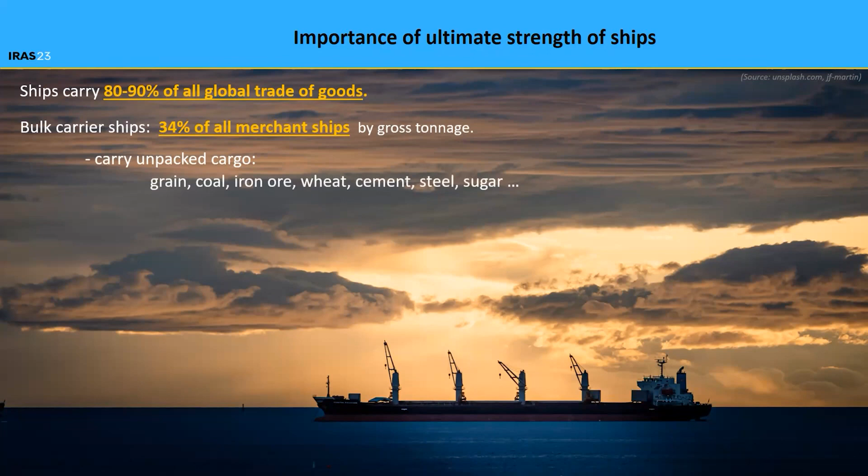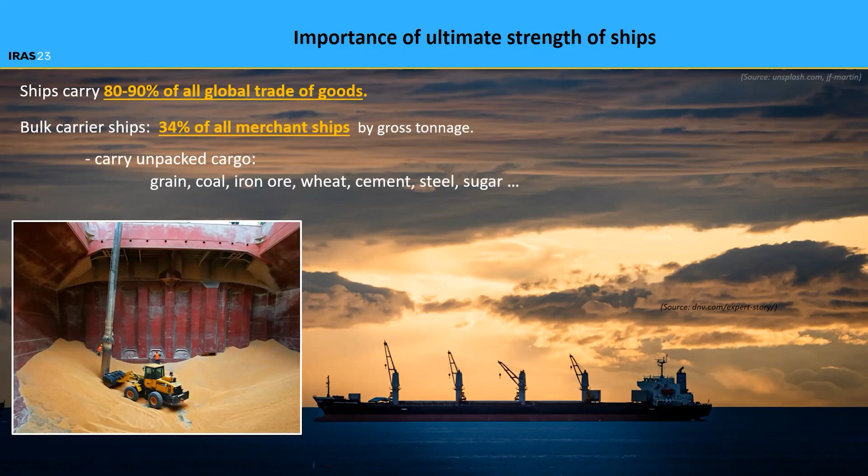Here you can see the shape of one cargo hold, which is structured within this cargo ship shown on the slide. This is basically a box shape in which you load and unload the cargoes. When it comes to age split, almost 60% of these ships are aged between 5 and 14 years, and ships are generally designed to last until being 25 years of age.

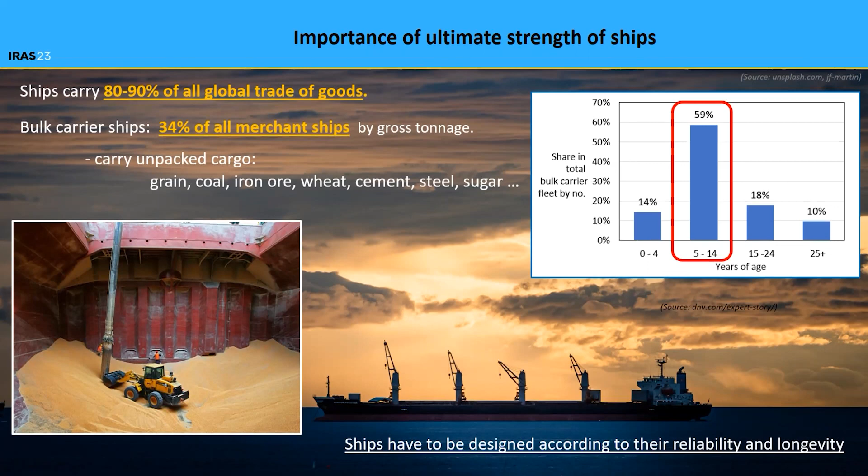So we can conclude basically that ships have to be designed according to their reliability and longevity to experience service loadings, as well as what we call once-in-a-lifetime loadings. In that sense, we have basically two approaches in structural assessment.

The first one is, of course, the traditional one, in which we assess the elastic response of the steel hull. Basically, you impose service loadings, and then you obtain stress. You evaluate this stress based on the allowable stress, which is prescribed by the rules. You can use prescribed rule-based formulas that are based on experience, analytical and numerical methods, and also direct calculations.

Most notably, I would mention buckling assessments, because ships are very prone to buckling and sudden collapse, as they have slender plates, and the slenderness of these plates is very high compared to some other conventional structures. Basically, the outcome of this assessment is whether you state that some type of structural member experiences yielding, collapse, or failure.

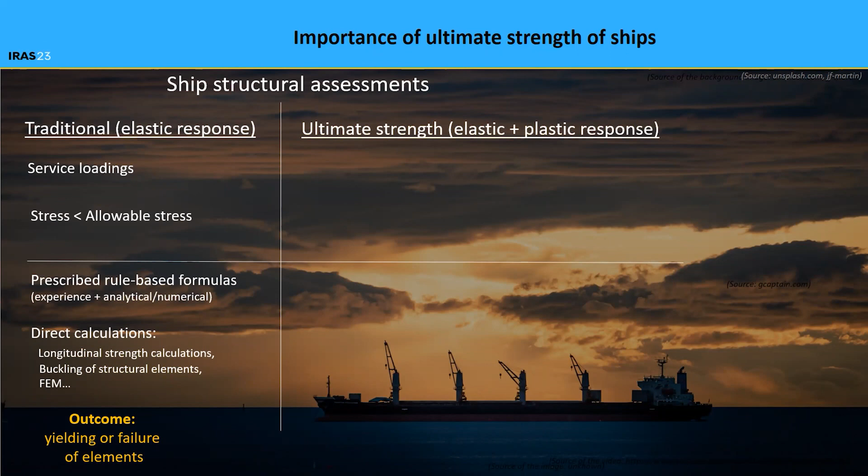On the other hand, we have ultimate strength calculations or assessments that have emerged in use in the past decade. They are based on elastic and plastic response of the hull. They basically evaluate extreme loadings or once-in-a-lifetime loadings, such as overloading events, significant waves, grounding, or improper overhauling.

I prepared a video, but I forgot to copy it into the presentation, so forgive me. This is a very illustrative video. On the left side, you have a bulk carrier barge near Belgrade on the Danube. This event happened a year ago, in May 2022.

So in order to avoid this type of thing, you can do some kind of ultimate strength analysis. This is basically where you evaluate what the tipping point is from which the ship will collapse. You can do that by employing progressive collapse analysis, an incremental iterative method that has been used more recently over the past decade.

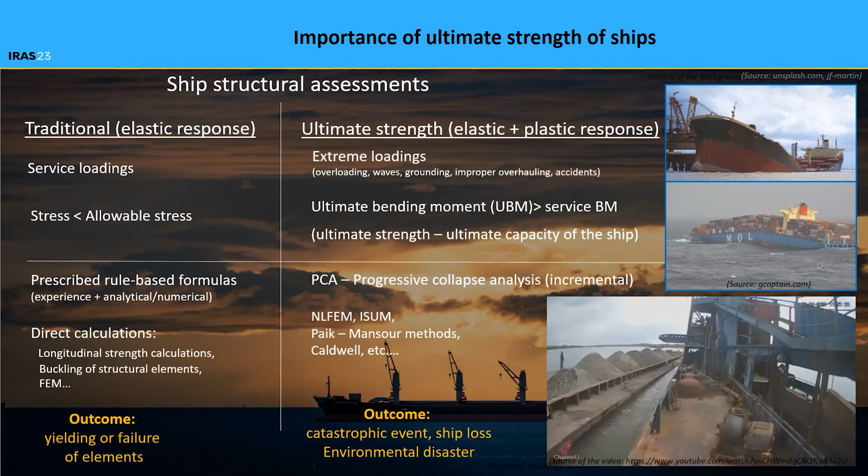Okay, so what we used here is progressive collapse analysis, and basically it relies on a few principles. Firstly, you have the hull cross-section, and here is the deck area, the side area, the bottom area. It is halfway submerged into the water, and what you do is divide your cross-section into, for instance, 100 subsegments.

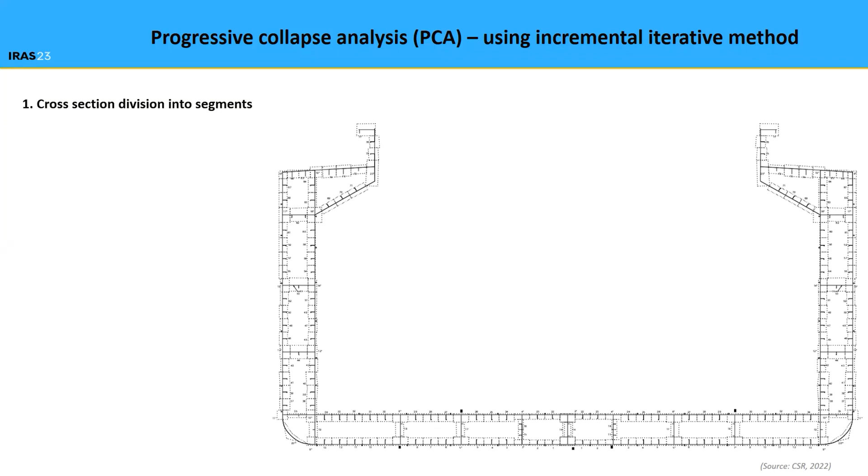Each of the segments represents, for instance, one stiffener, one plate, or a beam or stiffener with attached plating - small structural units, each of which has its own designated stress-strain curves, both in tension and compression, to take into account buckling and post-buckling behavior of each structure.

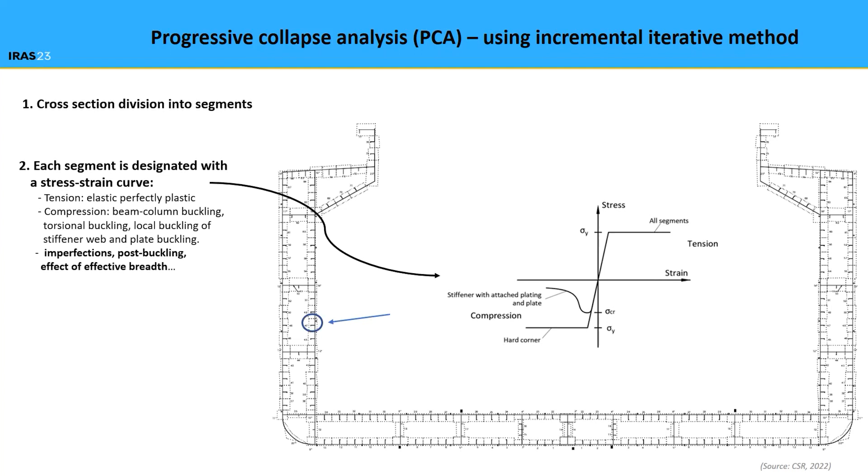So each of these segments has its own curve - it's not just one curve for all segments. Okay, so the next thing that you should do is impose an incrementally increasing curvature on the hull.

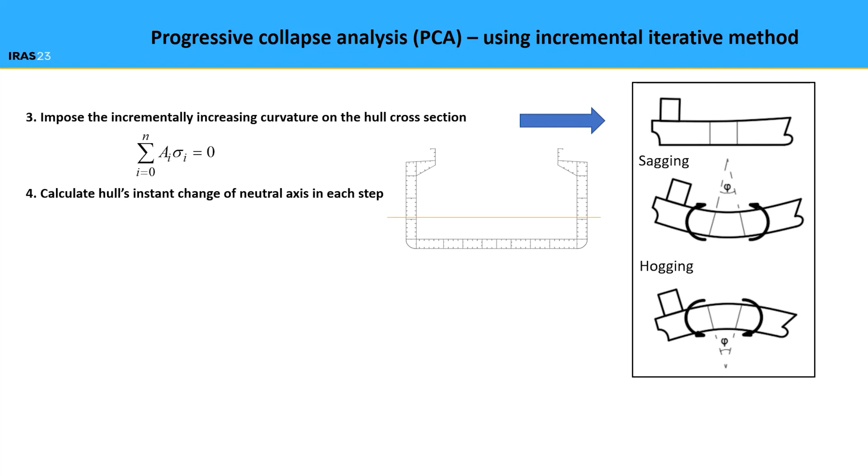You try to impose the curvature. By doing that, the sum of axial forces has to be zero, and you have to calculate the instantaneous change of the neutral axis. As you impose the curvature, the bending rises. As the bending rises, the upper elements collapse and the lower elements experience yielding. Then you have to calculate the strain of each segment, and finally the main outcome of this procedure is to produce a bending moment versus cross-section curvature diagram.

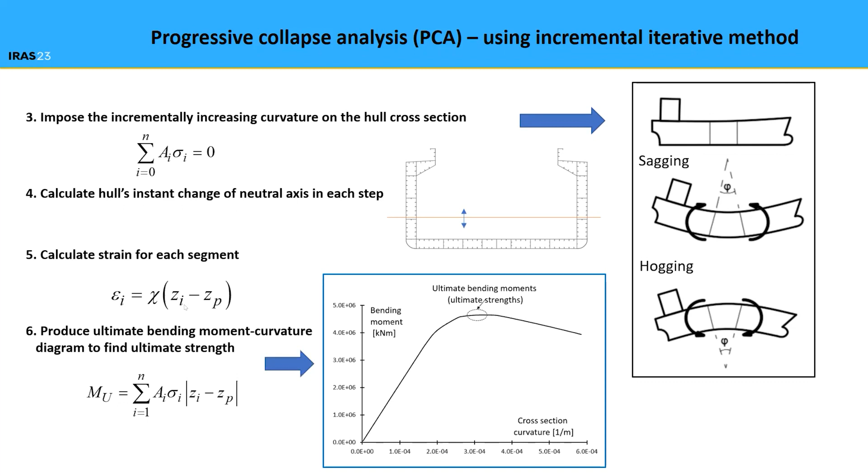When this slope becomes negative, that means the ship or vessel has reached the tipping point from which the ship will collapse.

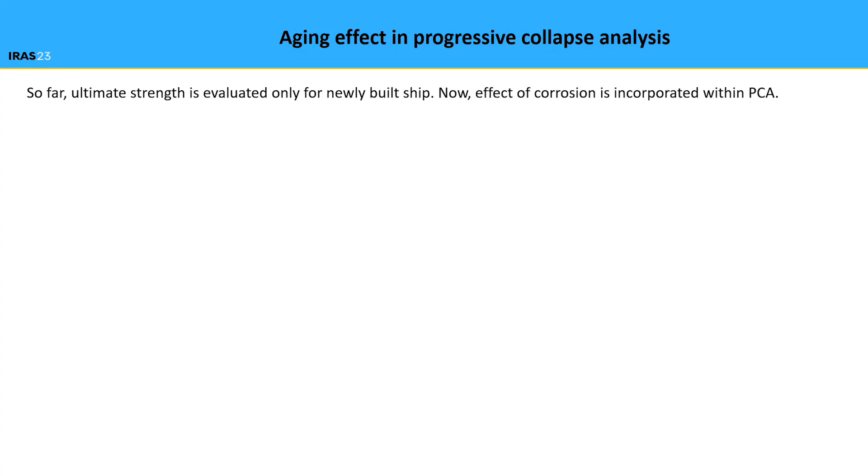However, in recent years we try to incorporate some other phenomena, for instance aging with respect to corrosion, pitting, and uniform corrosion. We model pitting corrosion by means of the pitting intensity degree, which is basically the percentage between the pit-affected area and the element area, and the corrosion intensity degree, which is basically the depth of these pits.

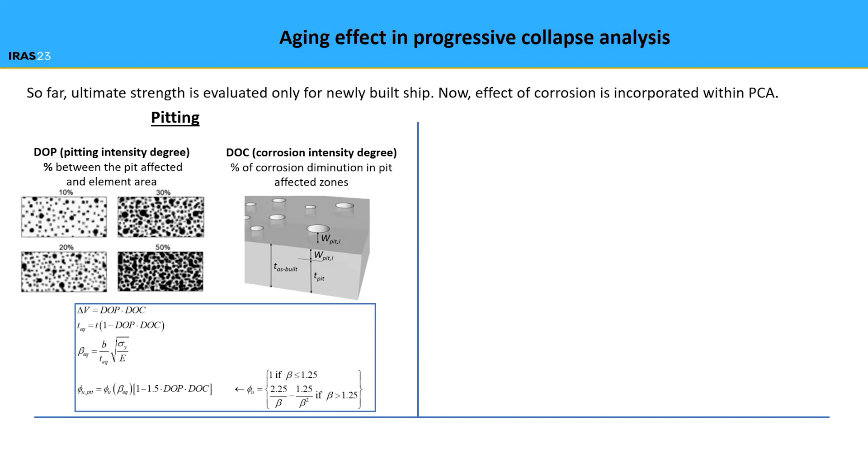By having these two parameters, you can calculate the actual volume loss caused by these pits, and subtract the original thickness by this volume loss to obtain the novel thickness of the aged element of the ship. With that reduced thickness, you also change your slenderness ratio. When you change the slenderness ratio, you change the ultimate strength of that particular element, and when you change the particular element's ultimate strength, you also change the ultimate strength of the complex hull of the ship.

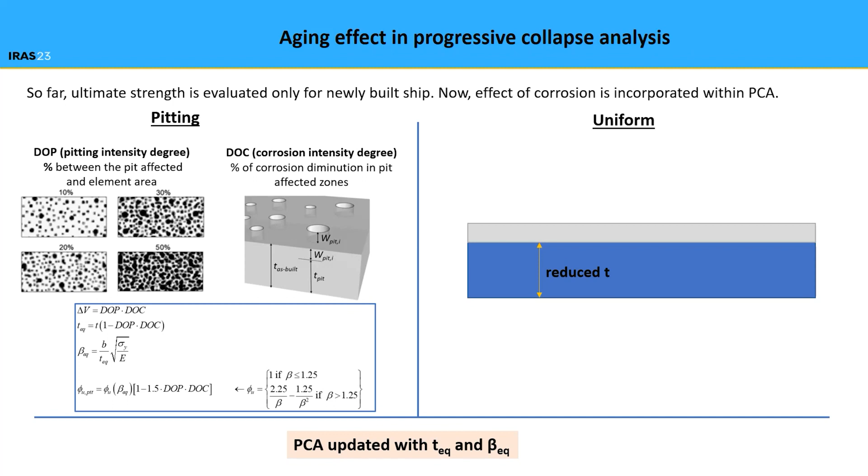On the other hand, when it comes to uniform corrosion, this phenomenon is much simpler because you just reduce the material through uniform wastage. So we updated this method, programming in the reduction of thickness and the change of the slenderness ratio for each of the elements.

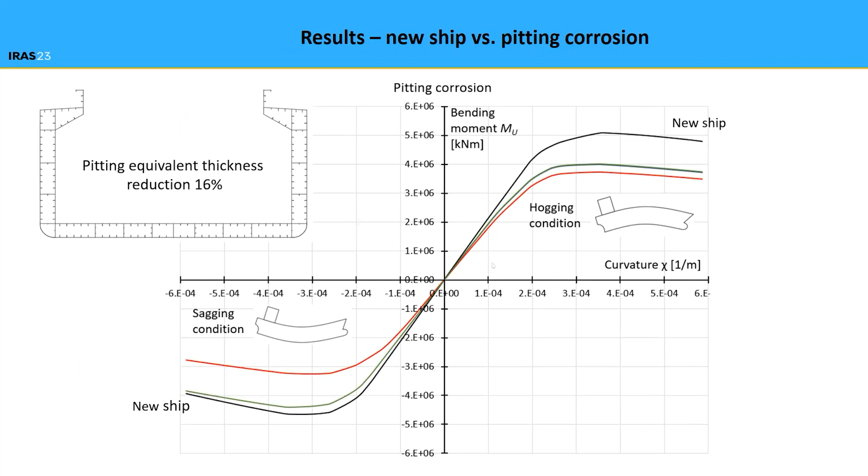So let's see some results. We plotted here the bending moment versus curvature. You are basically increasing the curvature incrementally and calculating the actual bending moment needed for such curvature. This is the curve for the new ship, and this is for the case of pitting.

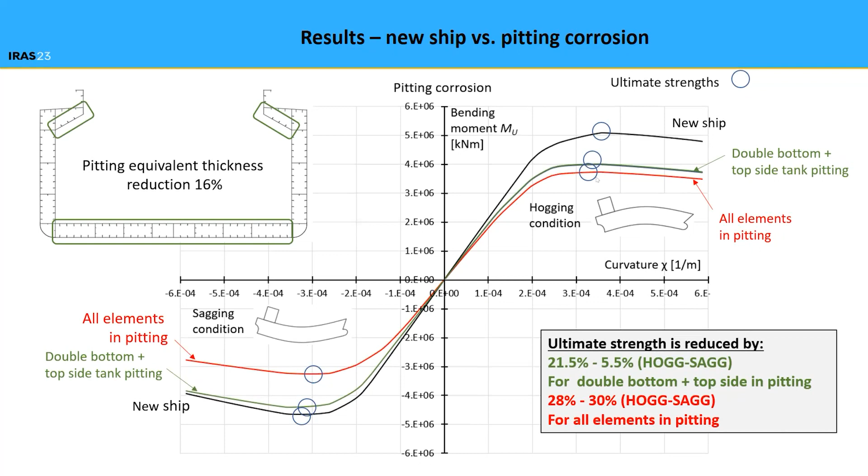We have several scenarios, for instance all elements in pitting, or some of the elements experiencing pitting. You can see that this ultimate strength, or tipping point from which the ship will collapse, is not the one that industry standards are currently taking into account. When it comes to aging, these ultimate strengths are significantly lower, up to 30% lower than when we consider the new ship. When it comes to uniform corrosion, the same analysis is performed here.

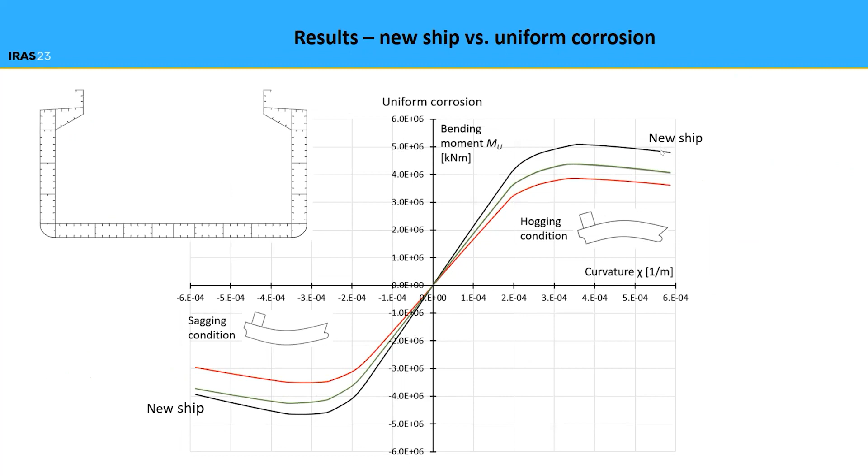Let's just look at the right side of the diagram due to time. This is the new ship, and some scenarios in which the ship experienced uniform corrosion. You can see the reduction of ultimate strength is also significant here, up to 15%.

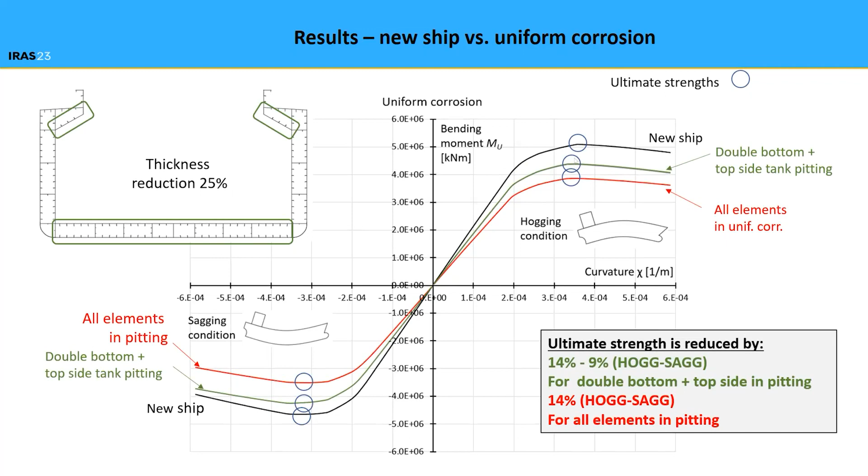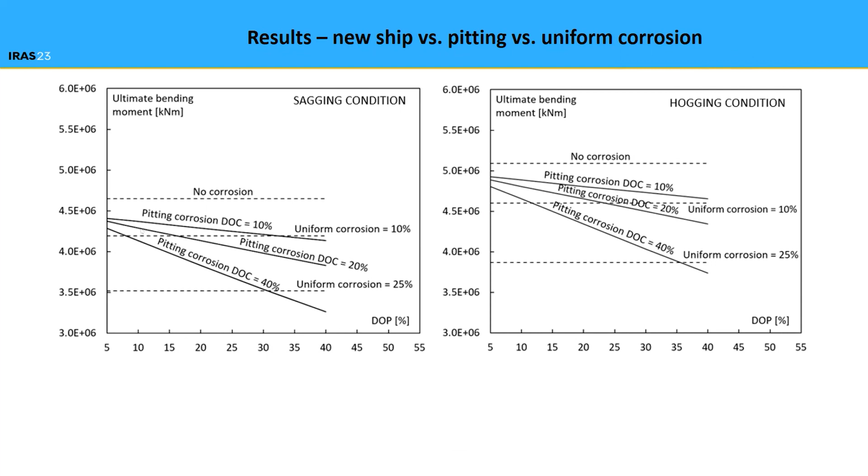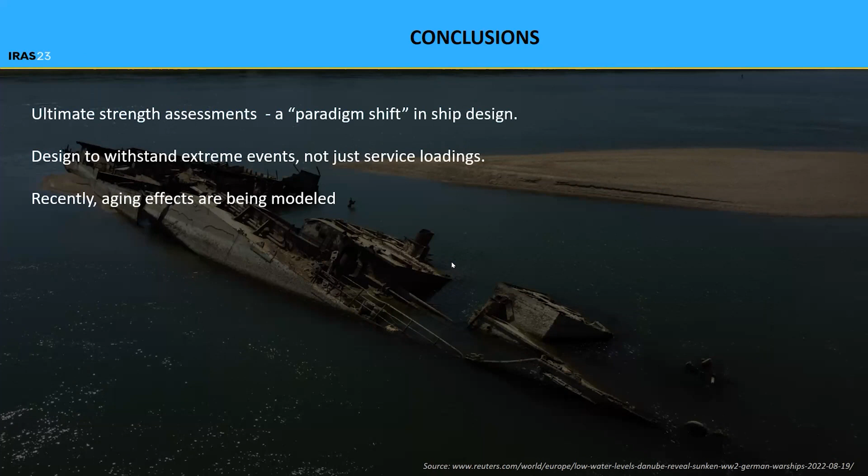To conclude, in recent years these ultimate strength assessments present a paradigm shift in ship design. Ships are of course designed to withstand service loadings, but we also have to take into account extreme events. Recently, when you couple this with aging effects, it appears to have a significant effect on the ultimate strength of the hull.

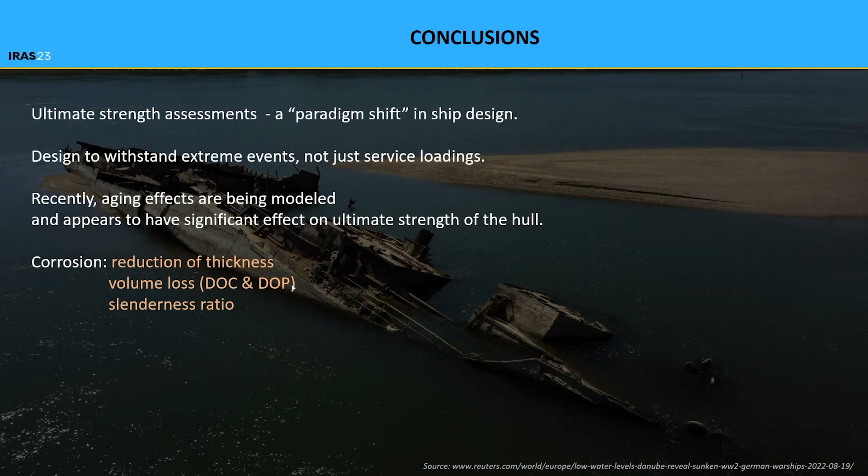When everything is within elastic limits, with small Mises stresses for instance, everything appears safe. But when you cross certain limits, effects such as buckling, these smaller effects gain increased significance. Corrosion is modeled here by reduction of thickness, reduction of volume loss, actual change of the slenderness ratio, and change of the particular ultimate strength of the stiffeners or platings.

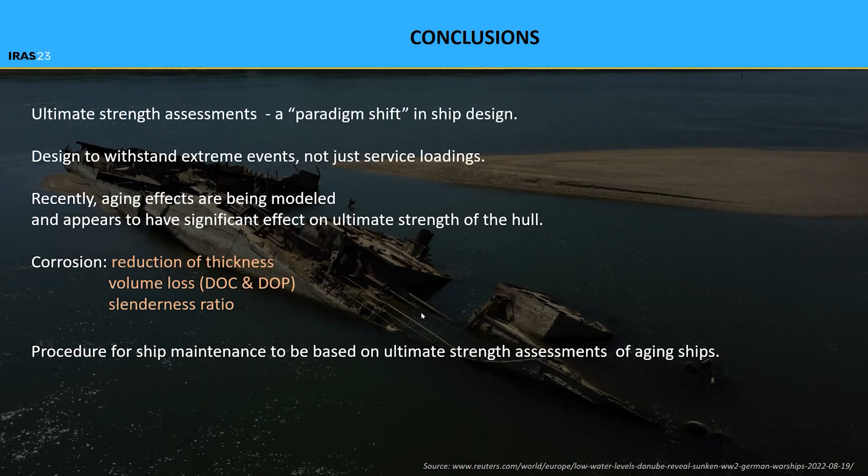Procedures for ship maintenance can be updated based on ultimate strength assessment of aging ships. Something we need for further investigation as naval architects, maybe from you guys in material science, which we are not, is to update this data with other parameters such as stress-strain curve aging, modulus of elasticity, or yield strength aging.

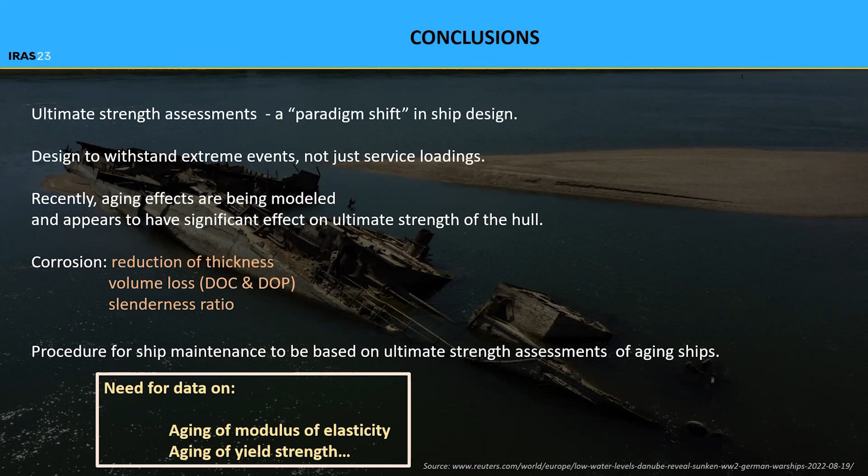So basically, that would be it about the work.